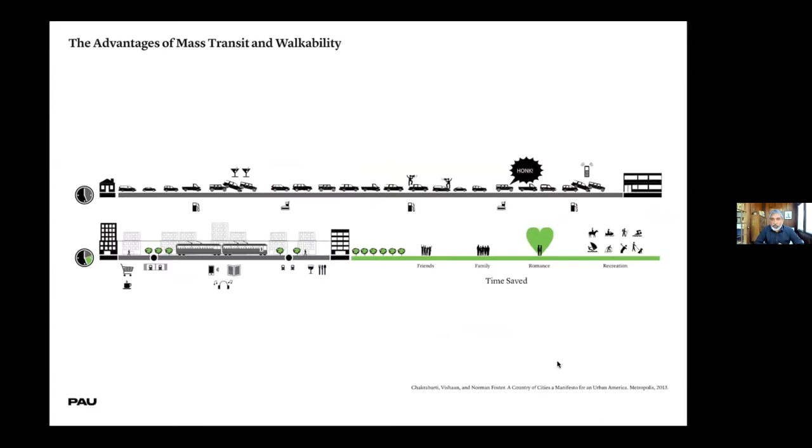I think what we're seeing is a lot of young people gravitating towards the lower bar of using mass transit in order to gain time with their family and friends, and also to avoid all of the problems of driving in cities: road rage, texting while driving, drinking while driving, and horrible traffic.

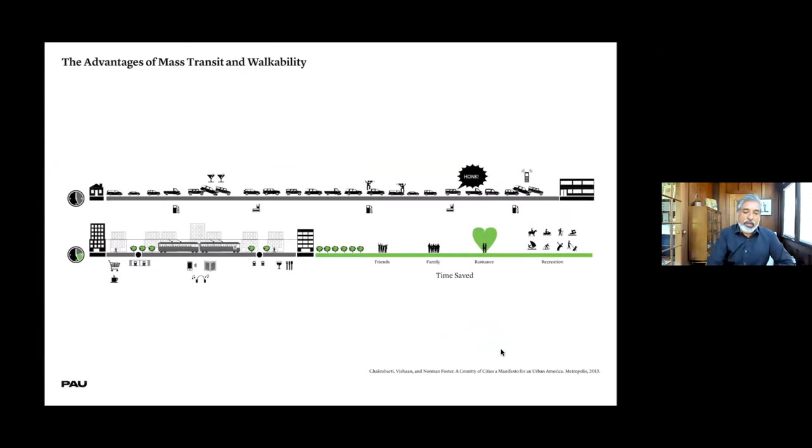There's a lot of issues with driving and obesity and other health issues. There is even a Swedish study that says absence doesn't make the heart grow fonder. In fact, it makes it break, with commute times more than 45 minutes resulting in higher incidences of divorce.

And then there's, of course, carbon emissions. It's interesting that in this country today we talk so much about a rural-urban divide, but one of the things that the rural and the urban share in common is a low carbon emission footprint per capita—meaning per person, inner cities and rural areas use similarly low amounts of carbon.

It's when you get out into the suburbs with their car dependency, with the single family homes, which are really terrible thermal envelopes, that you start to see carbon emissions skyrocket.

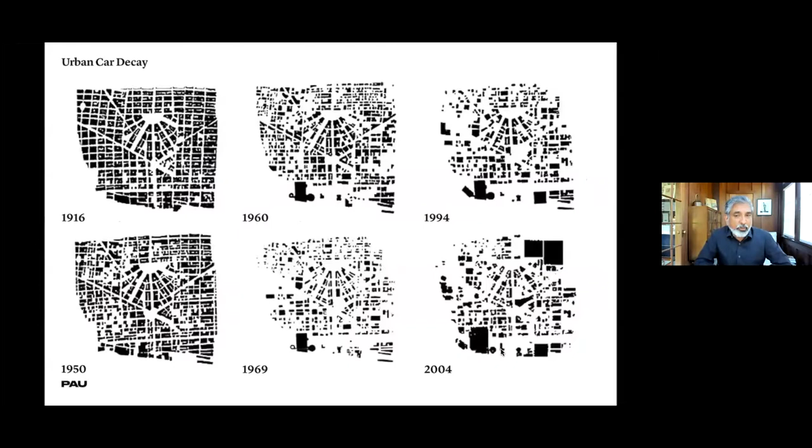This has had an extraordinarily corrosive effect on every major city in the United States, including Philadelphia, in terms of loss of density, loss of mixed use and affordable housing, to parking and roadway infrastructure. It's a kind of car decay, like tooth decay. And that has to do, again, with scale.

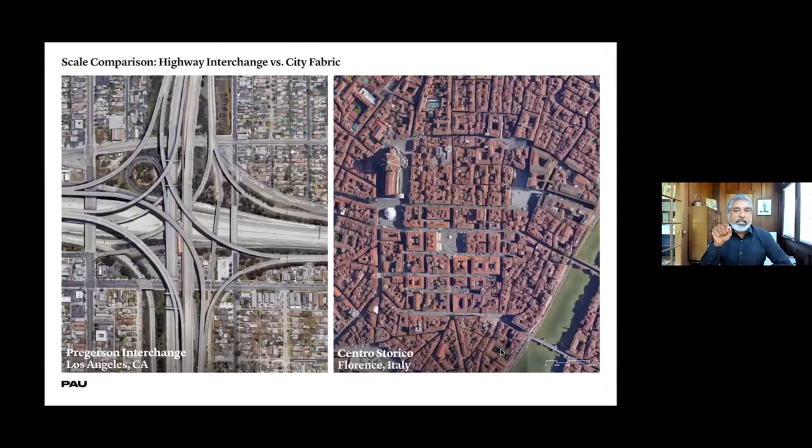This is a stunning image to me. These two images are at scale. The image on the left is a highway interchange in Los Angeles that is literally the same size as the historic quarter in Florence. What you notice about the image on the right is that it still has streets. Streets have been around for millennia. Streets were invented well before cars, because streets were invented for people.

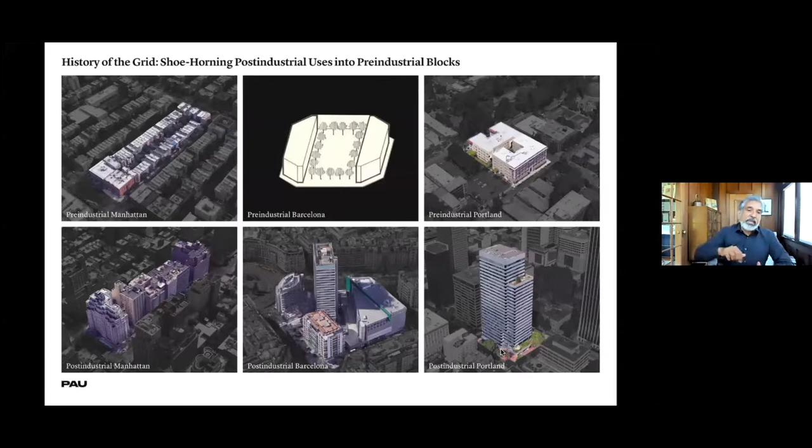It's only in the aftermath of the Industrial Revolution, when three big technological advances came at once—the invention of the elevator, structural steel, and the internal combustion engine—that you saw this massive transformation in how we thought about the city. Cities worked quite well in the pre-industrial era, as shown in the upper part of the slide, and then suddenly these larger buildings resulting from these larger technologies were kind of shoehorned into 19th century fabric.

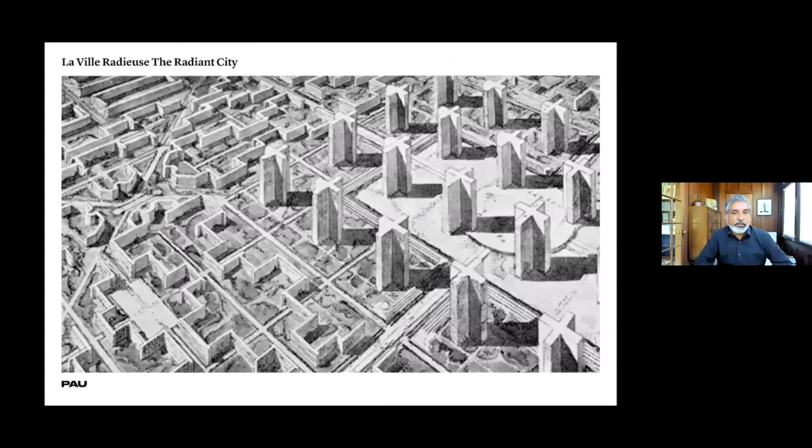Architects, of course, respond to this. Le Corbusier says, tear down much of inner city Paris to build towers and parks and, of course, highways. In the United States, this manifests in a very particular way after the work of Catherine Bauer and others in terms of creating public housing.

If you go back and watch this great documentary called The Pruitt-Igoe Myth, made by residents interviewing residents of the original Pruitt-Igoe, they will tell you that originally it was a utopian place. It was middle class, it was mixed income and mixed race. The St. Louis Housing Authority takes on a bunch of policies that are quite racist, quite misogynist, that lead to the destruction of Pruitt-Igoe through its mismanagement.

So it's really neither of the typical criticisms that we hear of public housing. And it's interesting that today public housing may come back as a force. But the reason I go through that history is because we had two kinds of issues going on in post-war America.

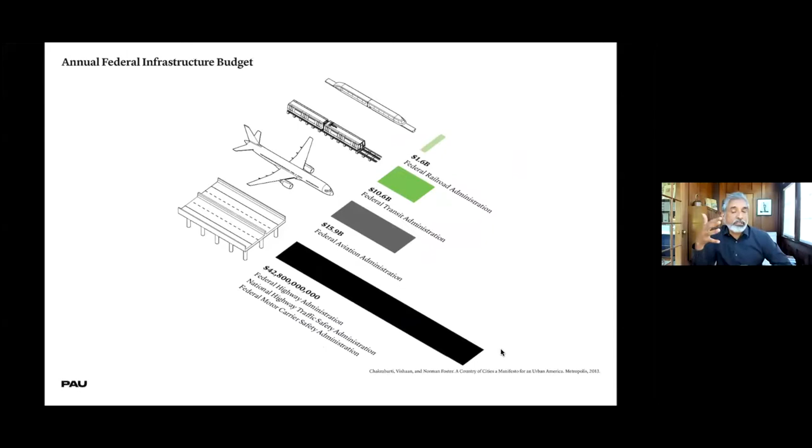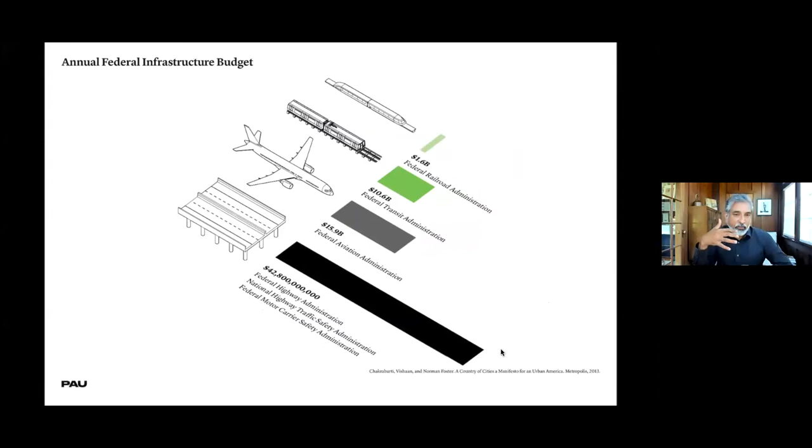And we still live with many legacies. So it's interesting, all this hand-wringing around the trillions of dollars that President Biden is proposing in the infrastructure package. We spend extraordinary amounts of money subsidizing road-based transit as opposed to mass transit, subsidizing fossil fuels as opposed to renewables.

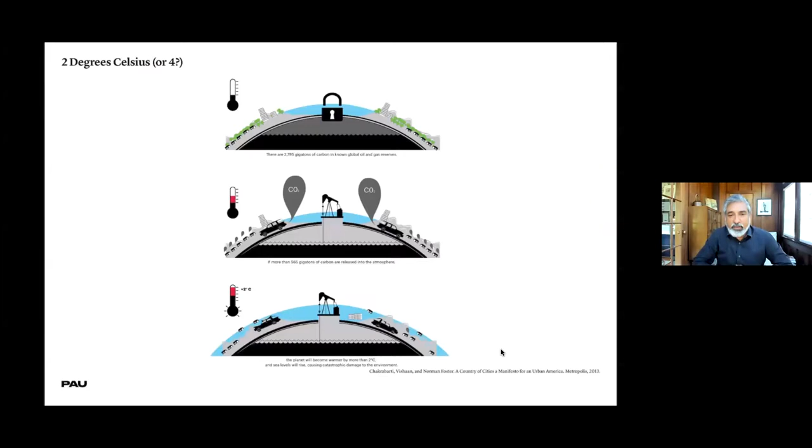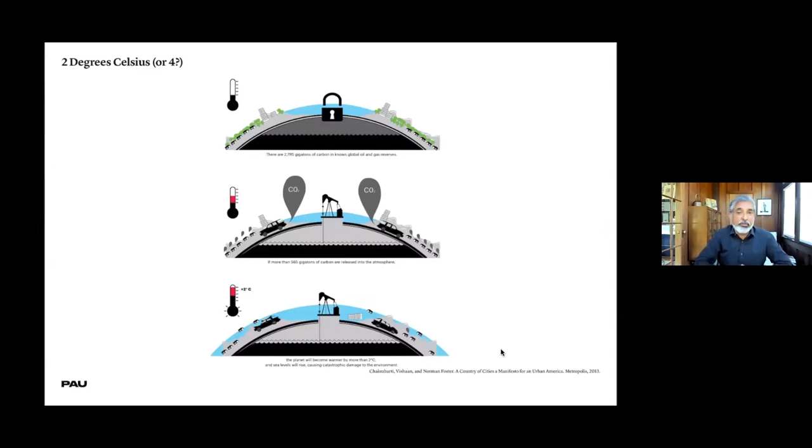And of course, in terms of climate change, this has led to the extraordinary precarity of the fact that we are on a path to raise the planet's temperature over 2 degrees Celsius, with almost cataclysmic effects guaranteed if that happens. It could go to 4 degrees, in which case our species is in very serious trouble. So we have to stop using all of these fossil fuels.

And yes, technology will play a role in that. Electric cars, sure, but if you're plugging your electric car into a coal-fired grid, you're just transferring the problem. So lifestyle has to come in tandem with technology in terms of changes to how we live. And there are lessons to be learned.

In many places, they're building densely in terms of density on top of mass transit, particularly in East Asia. But that's not what we've been doing. We've been building lots and lots of sprawl, and there is sprawl being built around the world to cataclysmic effect, particularly here in California, but increasingly around the world.

And so when we build new habitation, and we do have to build more habitation, we have 7 billion people on the planet today. There will be 11 billion by 2100. Those people have a right to live in great environments.

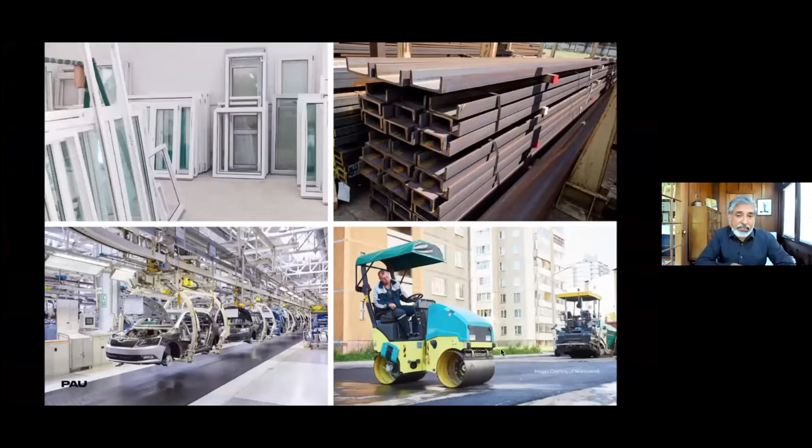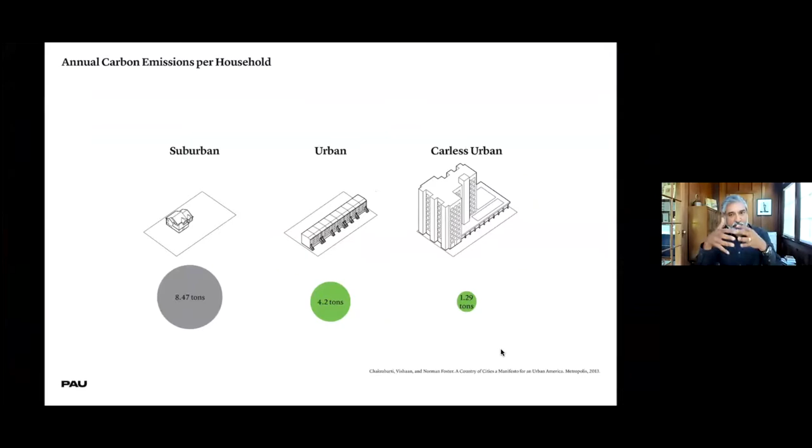And there's clues in terms of what's happening now in terms of the pandemic. First of all, we've seen the death of the office park. These ideas of segregated uses, suburban subdivisions, office parks, shopping malls, highways in between. This is not the future.

In Barcelona, 30% of people walk to work. They're trying to up that number to 50%, and it's interesting why. They not only want to up that number because it's good for people to walk in terms of their health, it's good in terms of sustainability, but they use this term that roughly translates as human speed, that there's this idea of a joy in walking because it is a more contemplative act, that people actually innovate more in that kind of circumstance.

And to me, that is what urbanity is. Urbanity to me isn't about huge cities versus small towns. It is about places that have this common ingredient where someone who's different — a Greek city planner, Doxiadis, talked about this in terms of the blue people and the red people well before our political divide — the idea that every once in a while someone's born who thinks differently than the people around them. And they feel somewhat isolated, they don't feel part of a community until they get into denser circumstances and they find other people like them.

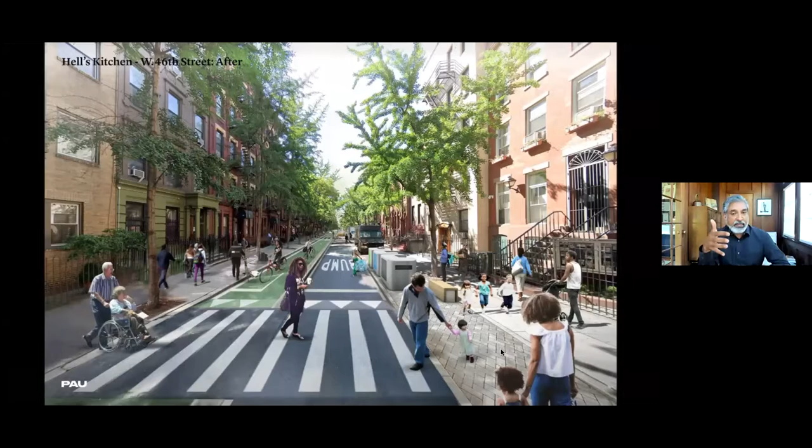So this may not be so fanciful for a city like New York. And what we tried to illustrate is that if you got rid of the private cars, there's more room for seniors, there's more room for children, there's more room to properly manage solid waste, to get deliveries, to have bike lanes, and just a more equitable environment.

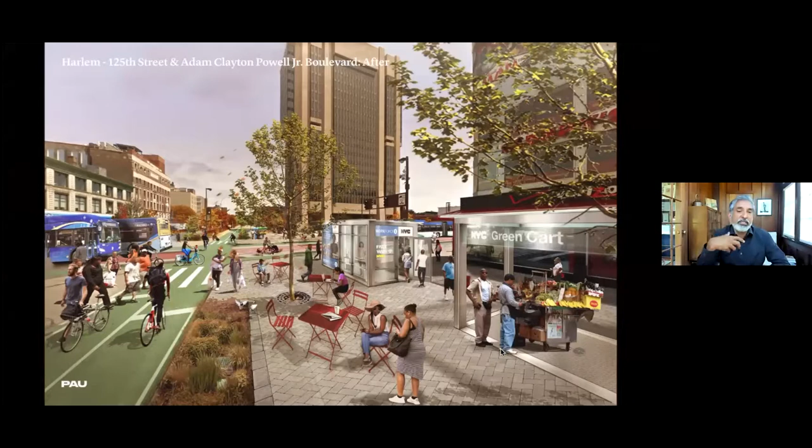This is up in Harlem, a legendary neighborhood, but with a tremendous amount of asphalt, 125th Street. Imagine what communities could do in terms of community participation, in deciding whether they want more green carts here, homeless services, or bioswales to retain stormwater.

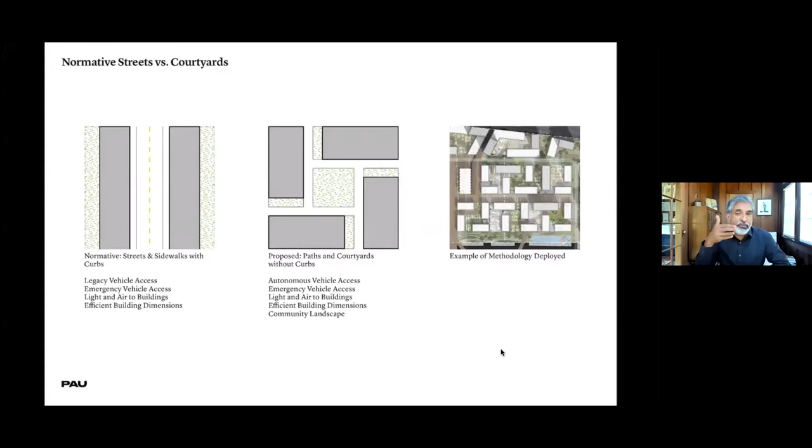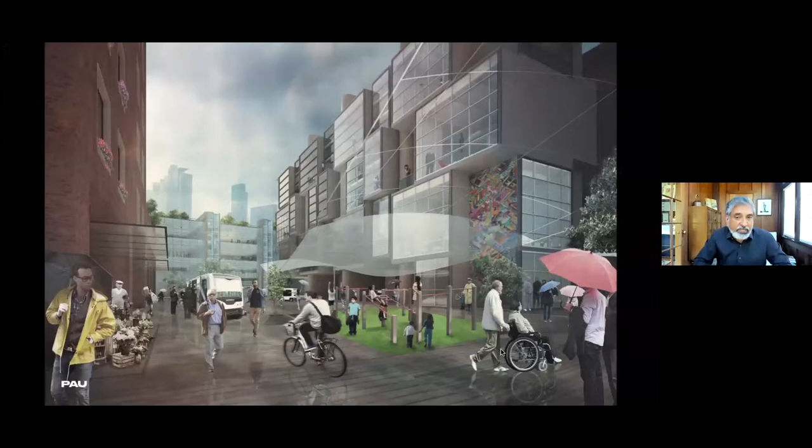There's a whole menu of things that could happen once this space is recovered for people. One thing technology promises, if we get more autonomous vehicles or just fewer cars, is that the space given over to cars could form 21st century courtyard environments. Our office has been prototyping what these environments could look like if they were predominantly pedestrian, using far more sustainable materials like cross-laminated timber, which is a carbon sink, with weather-mitigated public space for shoulder seasons, and a denser environment that people actually want to be in, as opposed to the rejection of density we see today.

Equity is a huge part of that. One of the things about walkable or bikeable environments is that they're also the more expensive environments we're seeing. This just shows that with more walkability comes more expense. And we have lost a huge amount of affordable housing in this country since World War II.

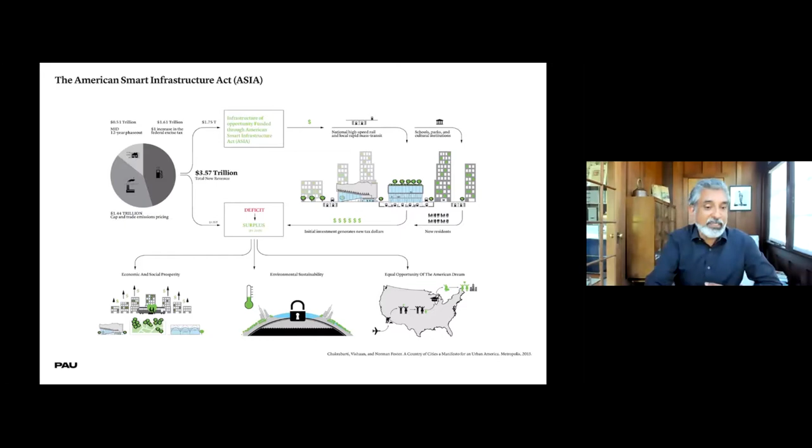In my 2013 book, I talked about redirecting a lot of the federal subsidies that go to wealthy people—for instance, people who own million-dollar homes and get mortgage interest deductions for no good reason. The UK and the Netherlands took them away, and real estate markets were fine. That money could be redirected towards affordable housing, cultural institutions, sustainability, and infrastructure. I called it in my book the American Smart Infrastructure Act, or ASIA for short, which was a hint. It's nice to see the White House now talk about a broader definition of infrastructure—an infrastructure of opportunity that creates social mobility through these kinds of investments.

That could apply in a territory of the city that's changing. When you think about Schuylkill Yards or the Navy Yard and other parts of Philly, we're moving away from a central business district model in our cities, because technology is enabling different parts of our cities to be places where people work, live, and play. What many of us are talking about, including the mayor of Paris, is the notion that within a short walk you could reach 80% of your daily needs.

What's interesting is if you talk to urban citizens about density, they tend to be apprehensive. But if you ask whether they'd like most of their daily needs within a short walk, everyone says yes. Then you say, well, actually you need density and mixed use, as Jane Jacobs talked about, in order to achieve that. So it becomes a different conversation.

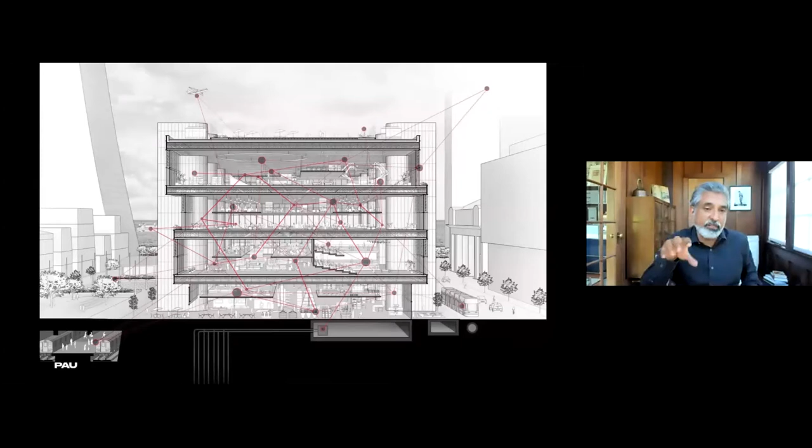I think architecture plays a critical role—how buildings open up, particularly on their ground floor, and plug into these infrastructures, is incredibly important to us as architects. So I'm going to close these last few minutes by talking about a couple of projects we're working on as examples of the case I just tried to make.

This is in Detroit. We're working for Ford Motor Company, ironically given the talk I just gave, because they're moving into becoming a mobility company. This building, designed by the same architects as Grand Central Station in New York, Warren and Wetmore, is the center of a new master plan we're working on with them.

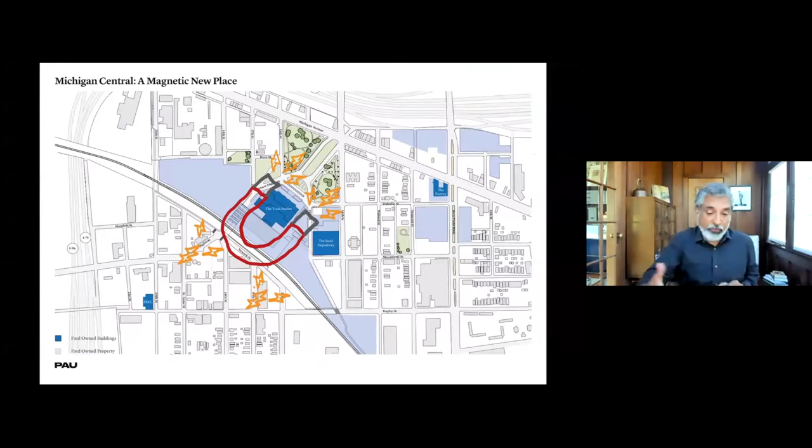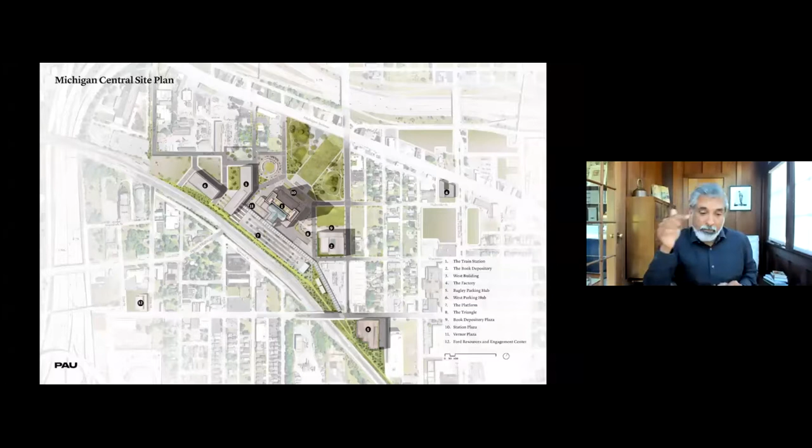This station was abandoned in the 1980s. Ford bought it. It's surrounded by asphalt and emptiness, and there are communities nearby, but they feel disconnected from this building. We're working on a plan with the community and with Ford to see how this old train station can become a magnet, a locus for new activity—not just with a series of new buildings where people could live, work, and innovate, but also with a whole network of public spaces, a landscape architecture designed by my colleague Mikyoung Kim in Boston.

One of the things—I worked on the High Line early on in New York after 9/11—is that I really believe in a very intense focus on the existing. Philly is filled with things like this, where existing infrastructures can be reused.

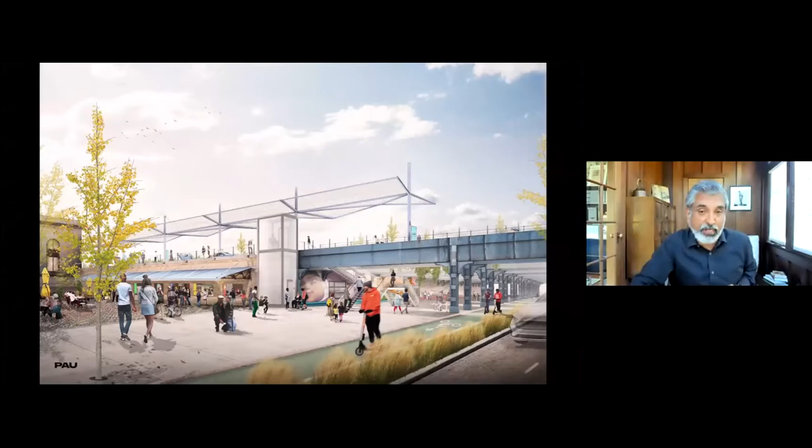There's embodied energy, there's history, there's a sense of identity in these places, but they become downtrodden. So this is just showing you some before and afters of taking the old train platform, some of which will be used for train use, but not all, and turning it into public space that's accessible to everyone with bike lanes and so forth.

We did this successfully at Domino. I've been working on this site for about 10 years now, and we're now the architects for that old sugar refinery, which is a landmark building in New York City. So we worked on the master plan with landscape architects, one of your local great firms, James Corner Field Operations, on the design for this master plan and this park.

This place was not a park. It was shut off from the community. The sugar refinery moved to upstate New York, and so it's wonderful to see people. There's a lot of different, very diverse communities, both racially and socioeconomically, that live near this park. It's great to see their kids playing together in the park.

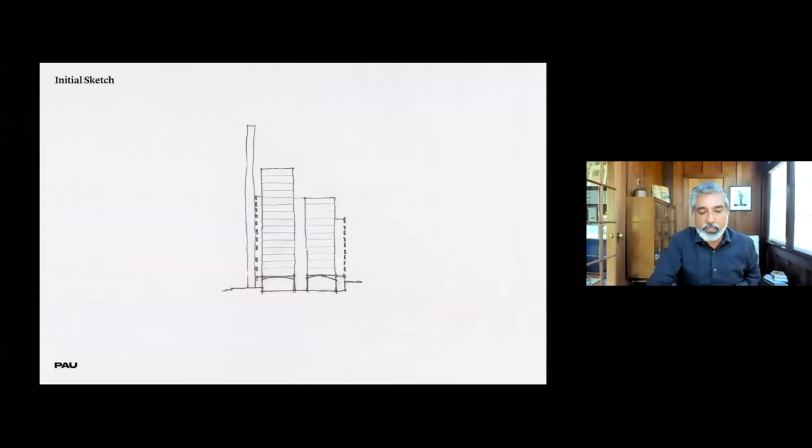And the building becomes also a new hub, like that building in Michigan, in Detroit, where one of the first sketches I did was about inserting this new structure into the old building.

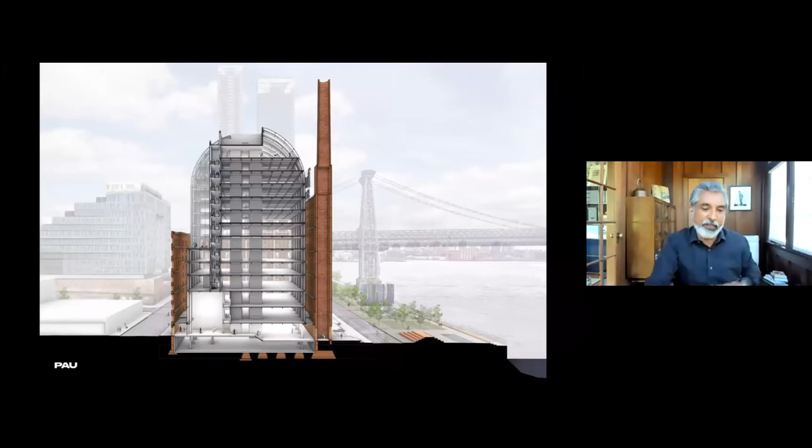And so this is the kind of diagram that is becoming this. This is under construction right now. And this is a new creative office building with a very public ground floor that's meant to be the new epicenter of this place. This passed almost unanimously in our Landmarks Commission, and I think those kinds of processes are incredibly important in terms of how a democracy functions.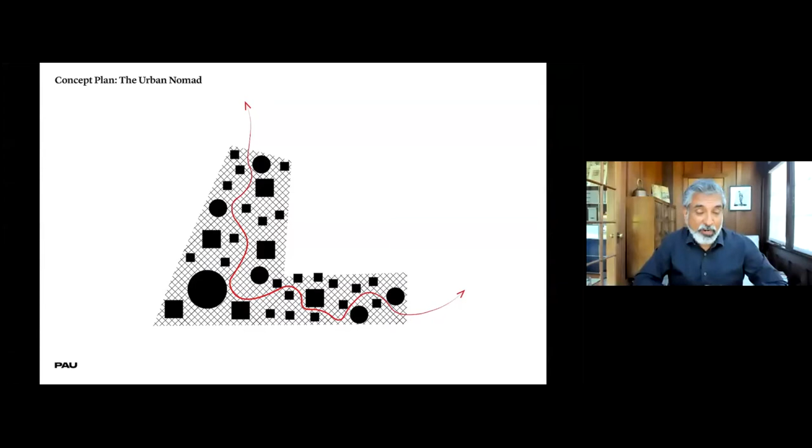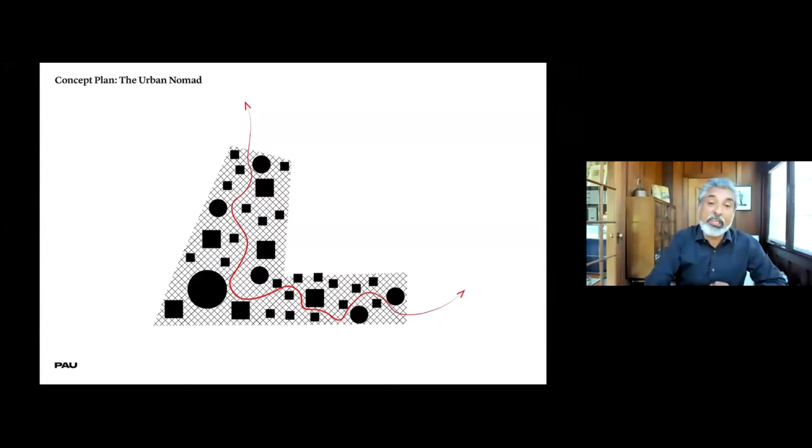We struggle with urbanity. We're a nomadic people. And so we talked about this idea of what the French call the flaneur, the urban nomad, of creating a space in which one could get lost, basically, and have that notion of wandering through the city.

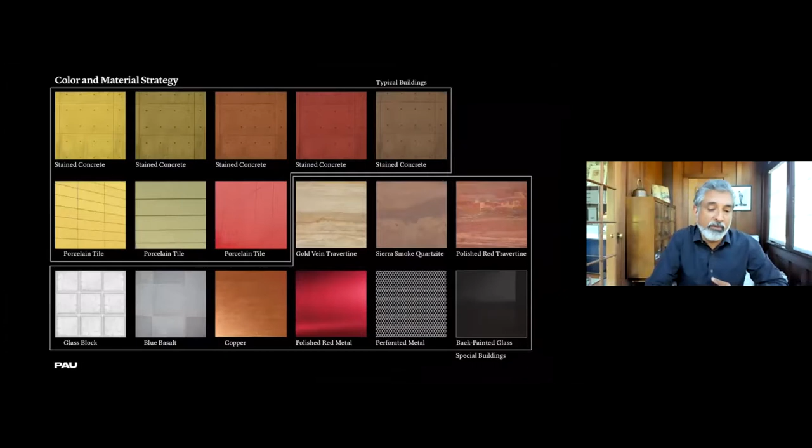And we wanted to do something that was very, very precisely local and looked very much at the color palette, which is just extraordinarily beautiful, and picked local colors that evoked that color palette. The Mongolians actually tend to build quite colorful buildings. And these are all relatively low scale — a mix of office, apartment, shops, a folk theater, an observation tower.

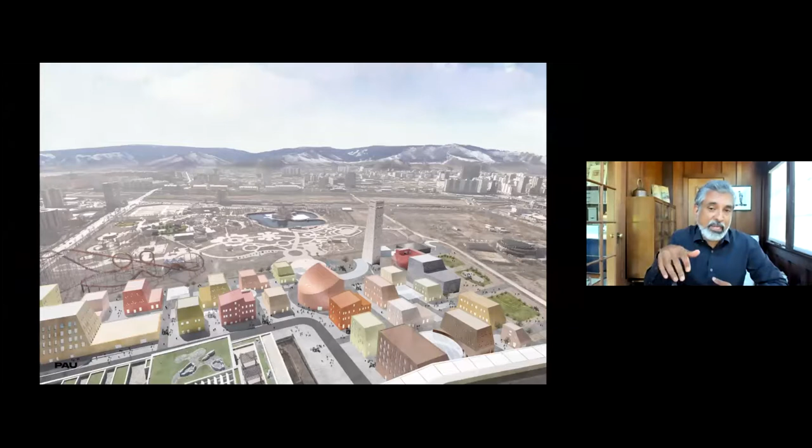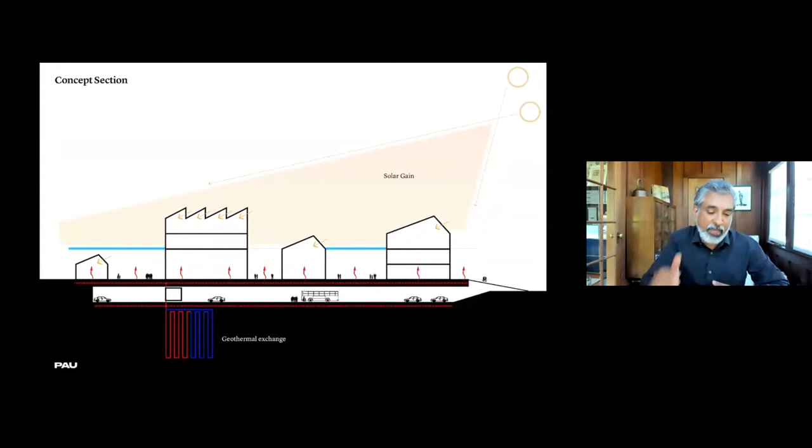There's very few pedestrian places in downtown Ulaanbaatar. It's a Soviet city. You see the Ferris wheel of the amusement park in the background. And it's meant to be highly sustainable in terms of how it captures heat in the wintertime, and a potential geothermal exchange for heating it and so forth.

But to me, one of the most important aspects is not one of these developments that's just a bunch of blue glass towers that you see everywhere, but something that is intensely local in terms of construction technology and identity and experience. Then to Bentonville, Arkansas.

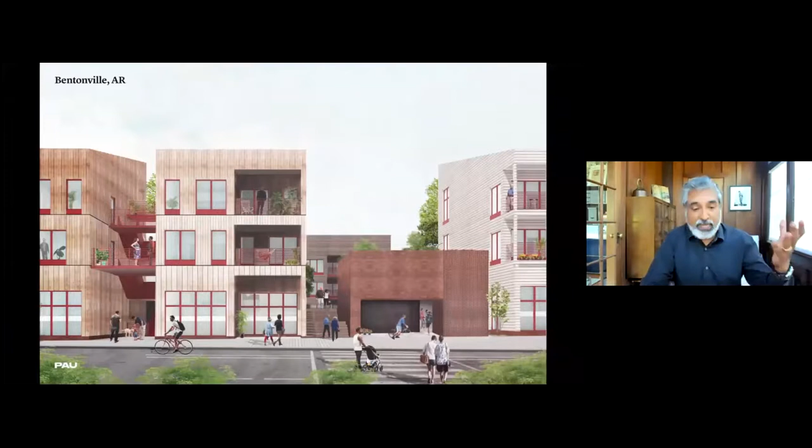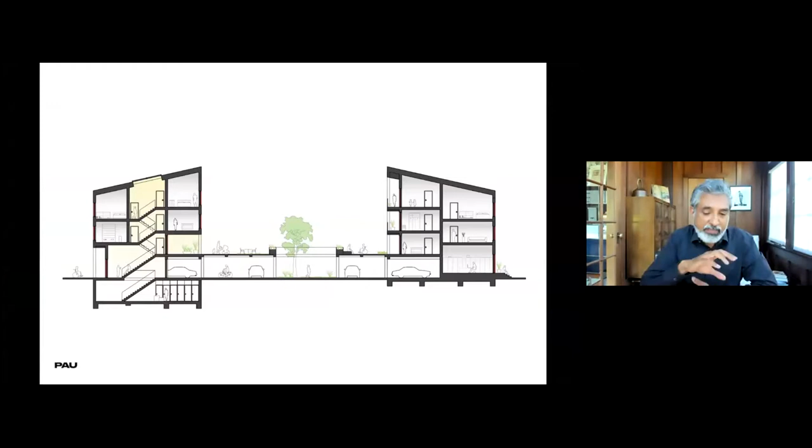This is an affordable housing project, a competition we won, using very, very low cost materials in a single family neighborhood to create a scale that was reminiscent of the single family neighborhood, and using code to understand how we could not build one of those anonymous elevator buildings and still have handicapped access to the ground floor units, and still have cars, but again, a walkable, bikeable community.

Last couple of projects here, just in East New York, one of the poorest parts of New York City, for a pastor who runs the Christian Cultural Center. This congregation, which is about 30,000 strong, extraordinary group of people, lost about 110 people to COVID.

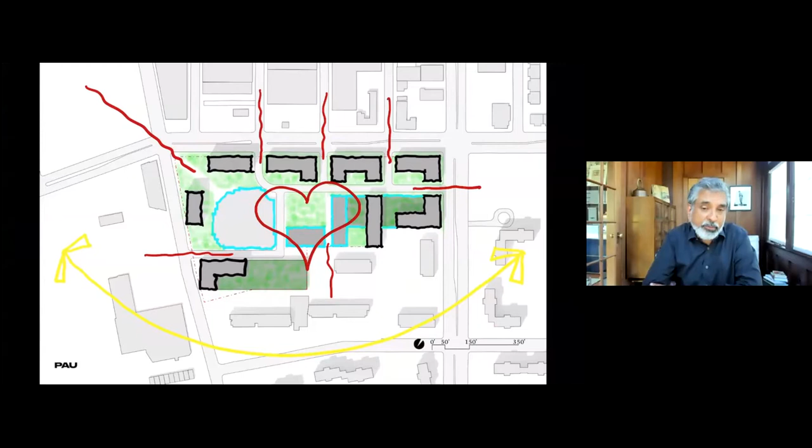The pastor wanted a place that people would naturally come, wanted a cultural center and a school, as well as about 2,000 units of all affordable housing. So this is 100% social housing, including supportive homeless housing for formerly homeless.

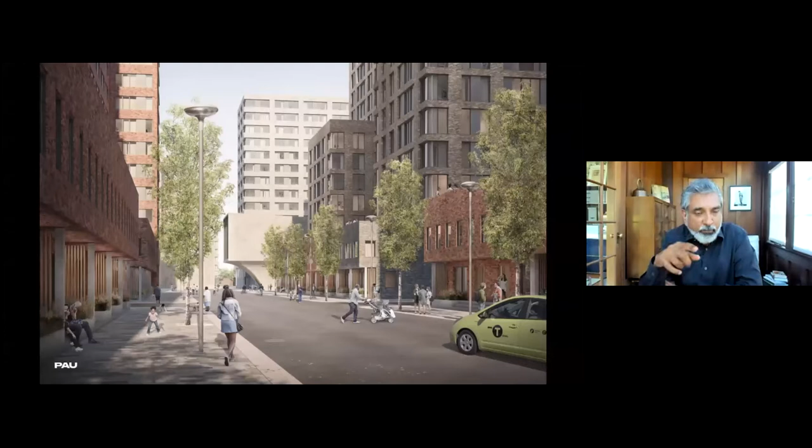So I think you're getting a pattern of where we like to work, which are places where cities are on the recovery from the post-industrial period.

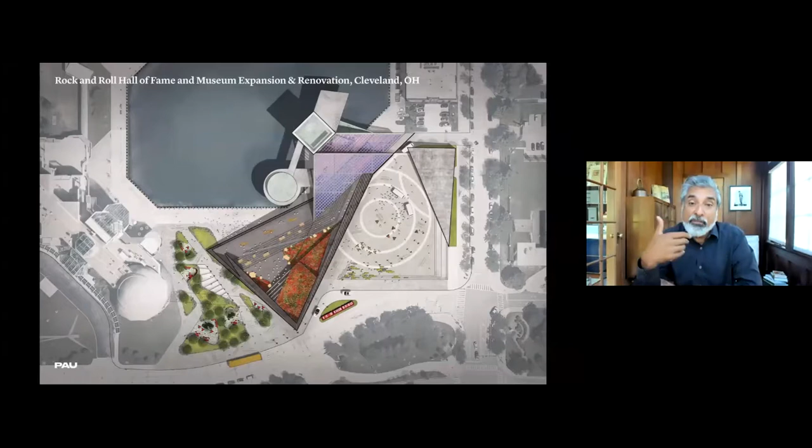We just won this competition to expand the Rock and Roll Hall of Fame, I.M. Pei's building in Cleveland. This building is so important to Cleveland and a real cultural center.

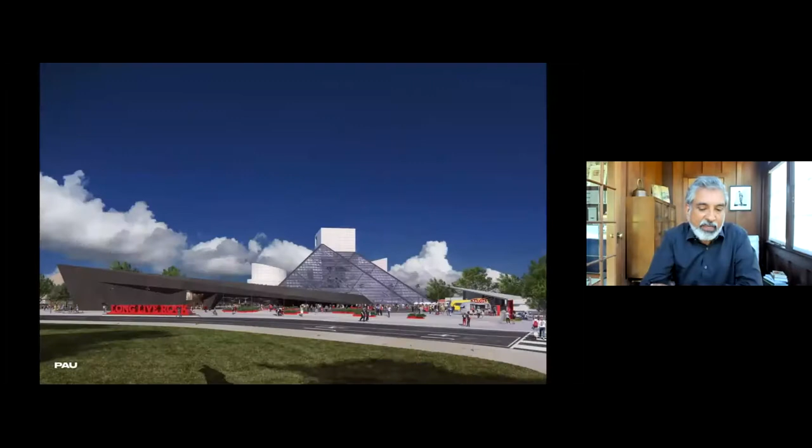And so this isn't the final design yet, but we're working on this new magnet, again, just like the building in Bedford and in Domino, to really create a cultural heart for Cleveland.

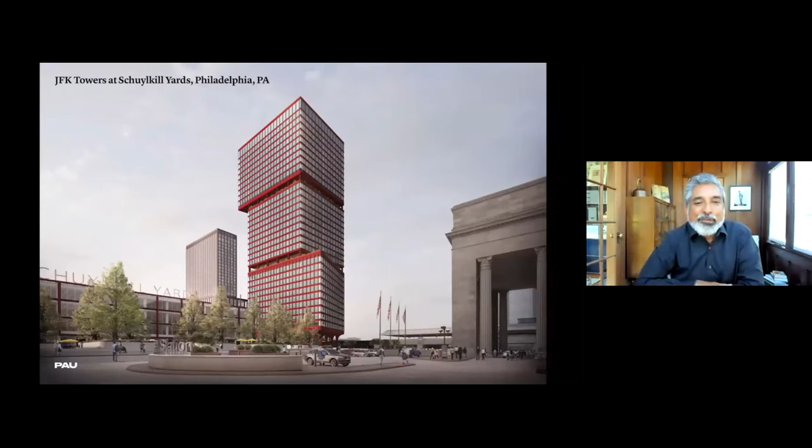And then I just wanted to close with Schuylkill Yards. Some of you may have read about this. We got a great review from Inga Saffron about these. This is the beginnings of Schuylkill Yards.

I think you've seen what's happened with the Bulletin building. You see 30th Street Station off to the right there. And again, this notion of creating transit-oriented density.

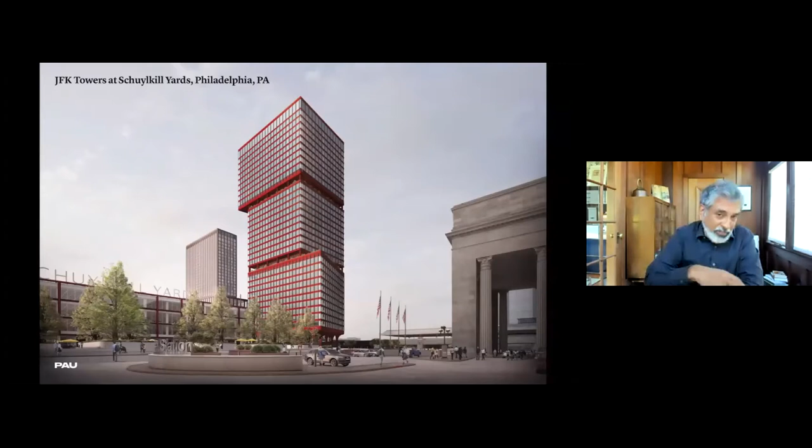This is a knowledge-based development in terms of the kinds of companies that want to move here, create jobs, in the life sciences. A lot of very interesting interactions with the community again, and a really great process with your Civic Design Review Commission.

So the origins of the design, we did an intense study of Philadelphia's heritage, its material qualities, everything from your earliest buildings to Frank Furness to Lou Kahn and I.M. Pei and some of your more modern buildings.

Part of the inspiration for this building were the red trains that used to run through Schuylkill Yards, the need obviously for modern glass, but then Frank Furness and the use of arches of terracotta. So the building actually will have terracotta at its base.

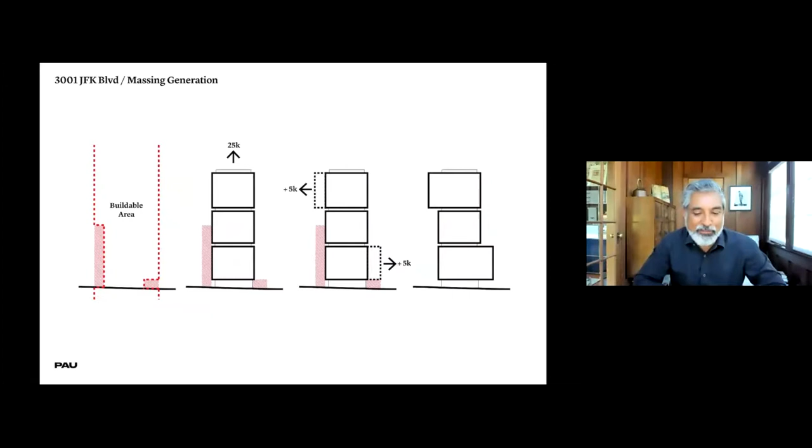And if you read the Saffron piece, it was all about having fun with the architecture. It's hard to think about having fun with an office building, but the whole idea was we had these office floor plate sizes that the client needed, and we had a certain zoning envelope.

We tried to create a building that was sort of like a tumbling set of kids' blocks, that if you turn the building on its end, it would still be the same form, with these cantilevers, one that pointed at the station, one that pointed at College Walk towards Drexel and UPenn.

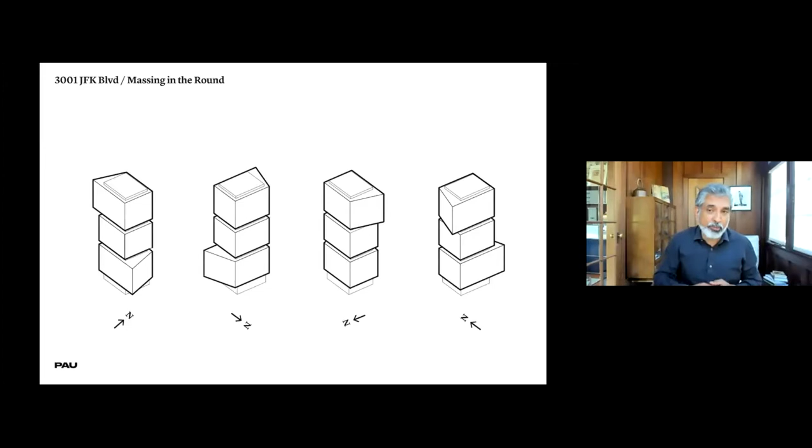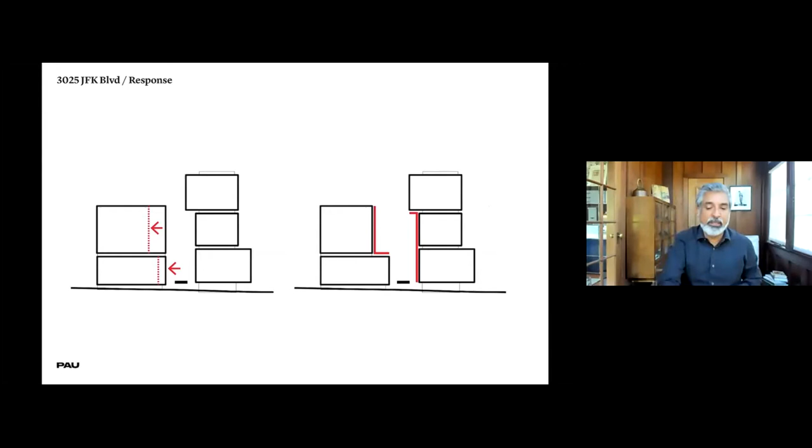So the building kind of changes from whatever direction you see it, creates a new public space underneath the rail viaduct between the two buildings. The building on the left is a residential building with, again, sort of life science and lab space below.

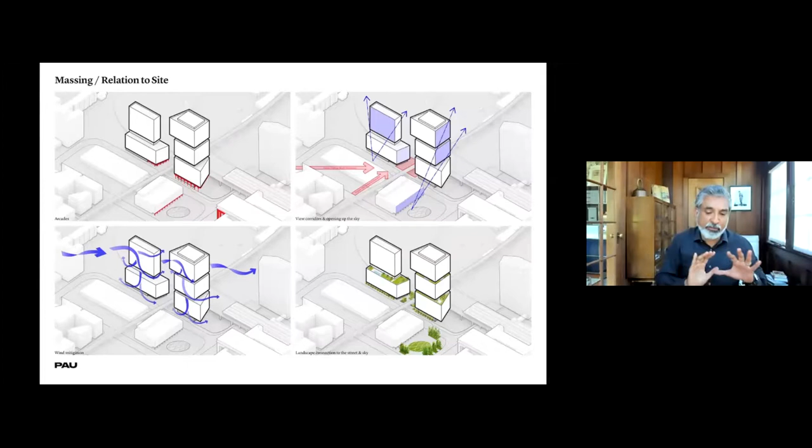And we did a lot of environmental studies about wind, because Schuylkill Yard's a bit windy, breaking up the massing from the street, bringing green and biophilia into the building.

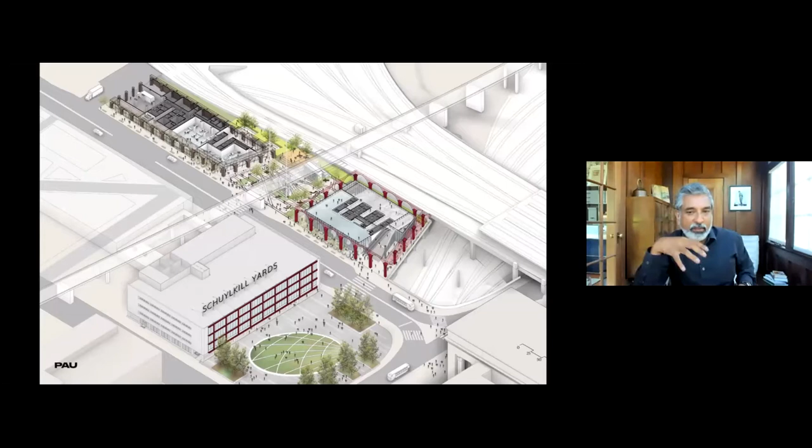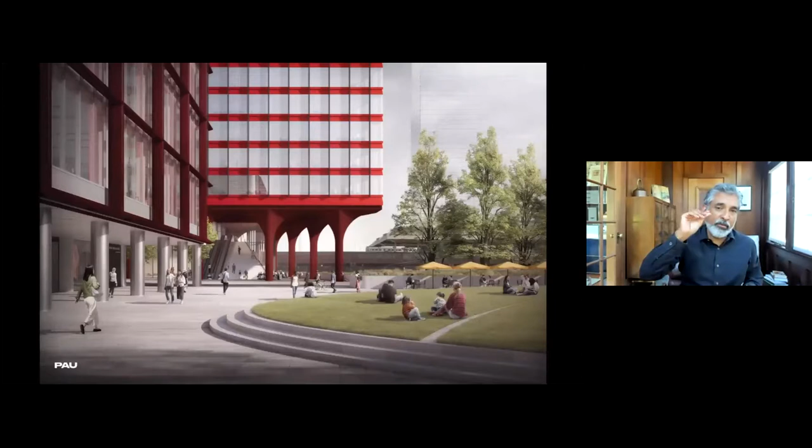And always these intense studies we do of the ground floor, that big arcade that will invite people in, again, a kind of terracotta. So wherever the human being gets close to it, you see this red terracotta with this very interesting polychromatic paint above that kind of shifts in the light and shifts as you move around.

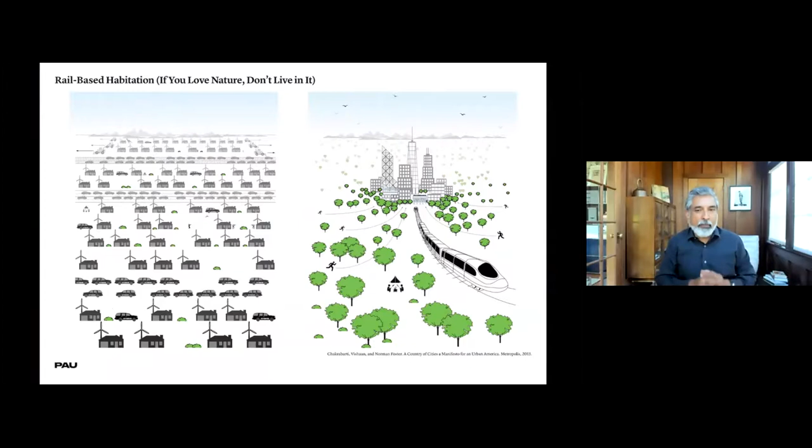So I'm just going to close by saying I really believe the future, especially in this post-pandemic moment, is about rail-based habitation with this kind of sense that if you really love nature, don't try to live in it, but actually live in more compact circumstances. You'll be able to get out into nature to go camping and take trains and so forth more easily.

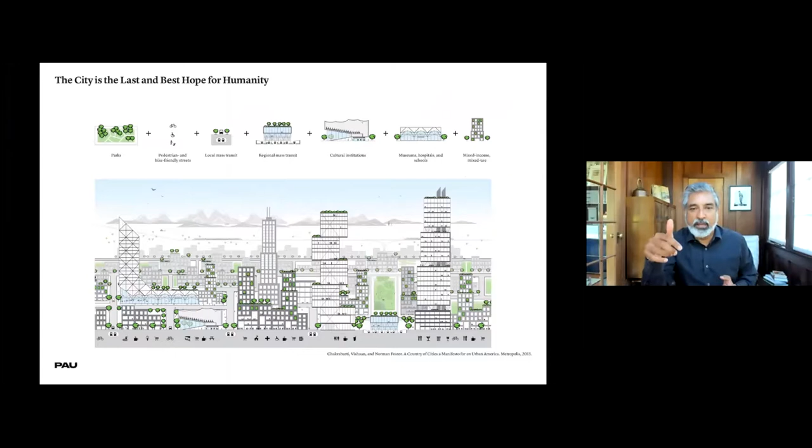And that if we do that, the city, along with new technologies, is the last and best hope we have for addressing climate change inequities and creating a more joyful culture and experience of the world. Thanks very much.